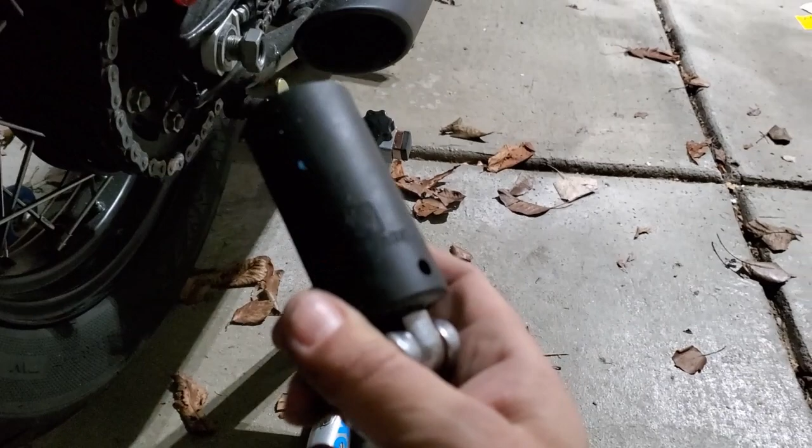Okay, so for the next thing we're going to be doing is taking off the rear fender. In order to get off the rear fender, you are going to have to take the entire back wheel off, and that's going to require you to put this up on a paddock stand so you can spin everything around. It's going to take a 27 mil on a breaker bar so that you can get this bolt here off.

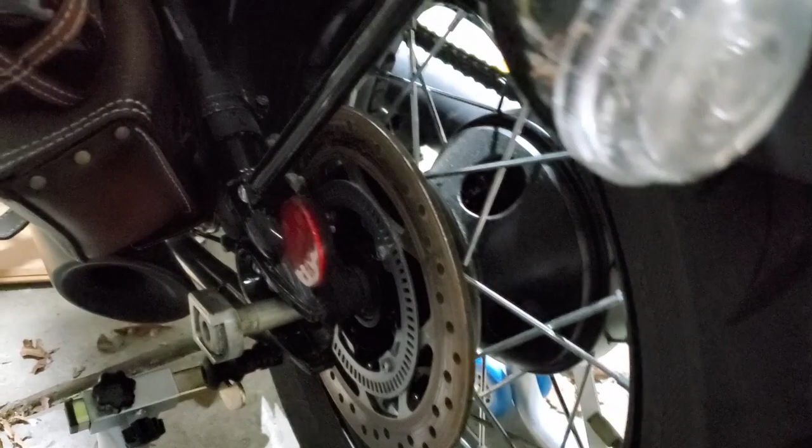You're going to take these pieces off, make sure you don't lose them. We're going to go back to this side, and we're going to start pressing this out. I'm going to need both hands in order to do that. So we'll be doing this with, the wheel's going to be off the next time.

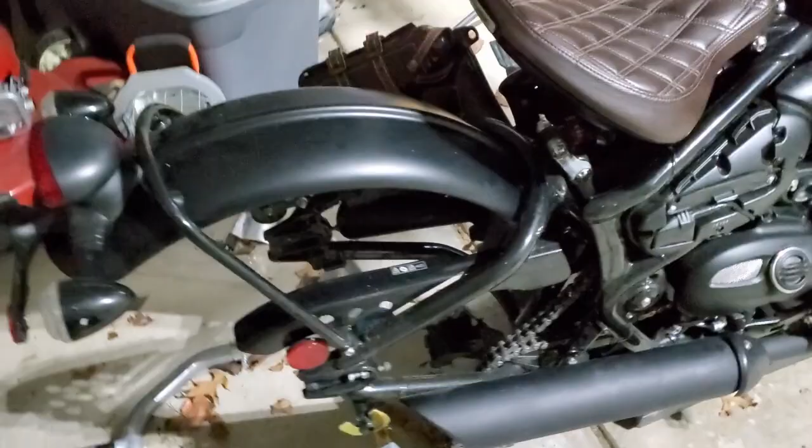I'm going to take that pin out and pull the chain off, okay? Okay, so that took 2 hands, and you just got to tilt the wheel in order to get it out.

Next thing we're going to do is use a T30 star bit, and we're going to remove these bolts here. Then we're going to go down, and at the bottom of the fender are these two, which hold it all in. So that is going to pull this piece here apart, and most likely we'll undo these ones over here as well, get it off of this mounting bracket.

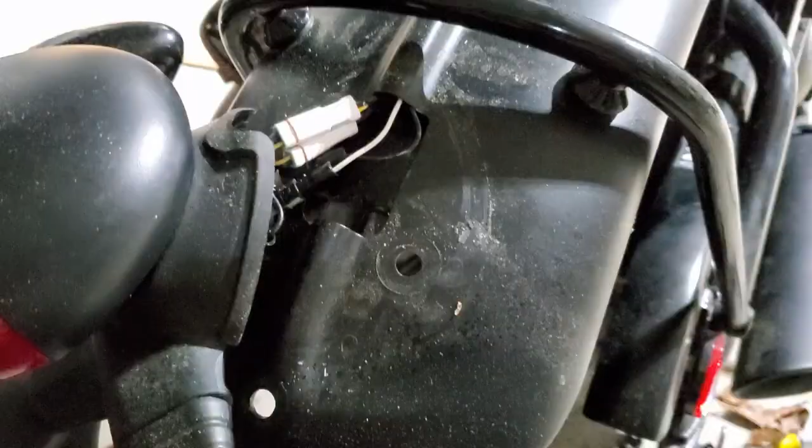Okay, so now that I got the rear assembly unbolted, what I'm going to end up having to do is unplug the lights in the back here, and the wires, if you can see, get routed through these little clips. It's hard to focus, but we'll be pulling the wires out of these clips all the way back down here so that when it comes time, we can pull everything through there and then wire the lights that are going to go in the back over here. Then I'll finish taking off the rest of the fender.

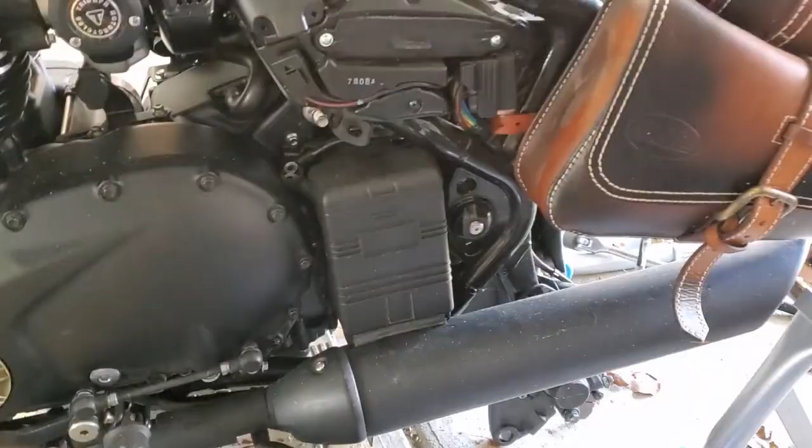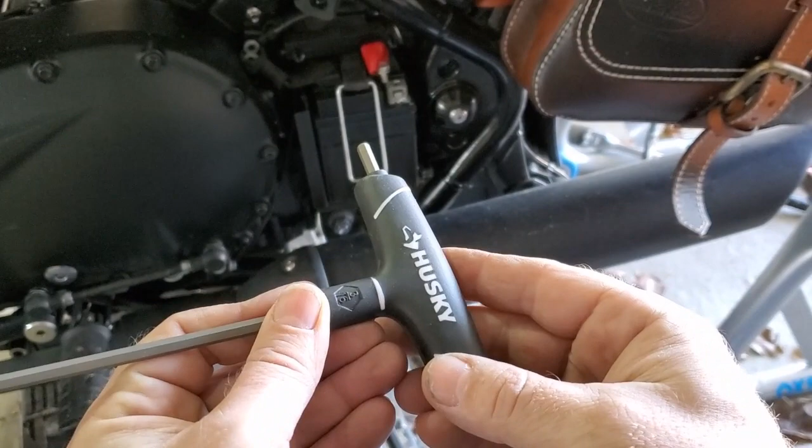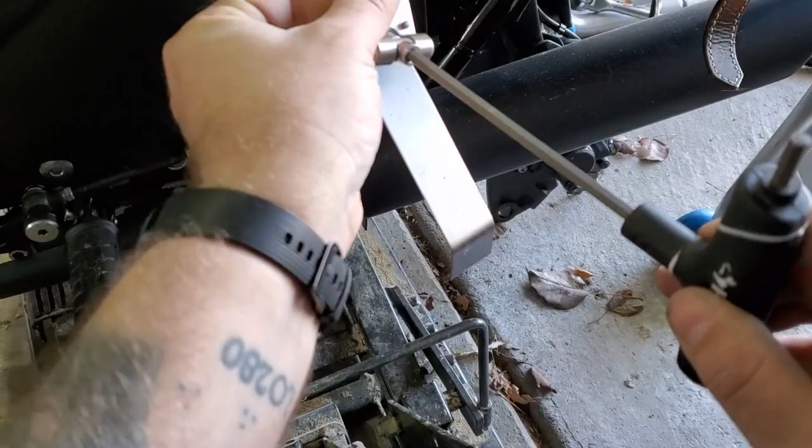Now, before we go any further, it's going to be important to go ahead and take out the battery. You pop off the cover. In order to do that, you are going to need a 3/16 Allen key, and you just put it in here, unscrew that, and that'll take it out. Go ahead and you're going to disconnect your positive and your negative.

So you got a Phillips head for your positive, and it's going to be another 3/16 for your negative. And then you're just going to disconnect and pull out your battery. That way you can do all your electrical work and not really have to worry about it.

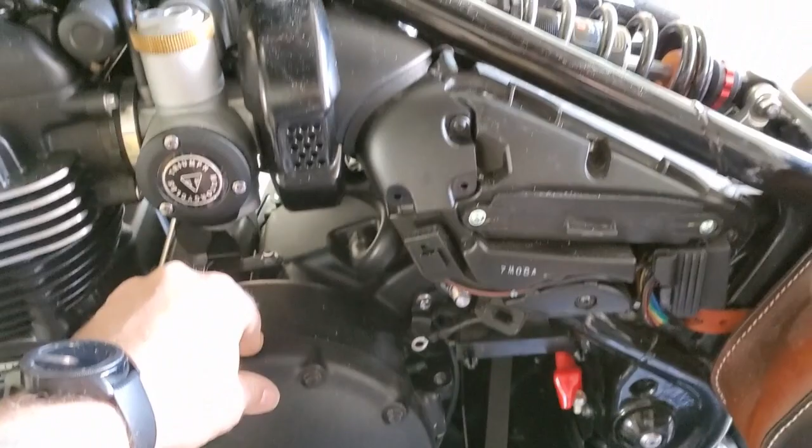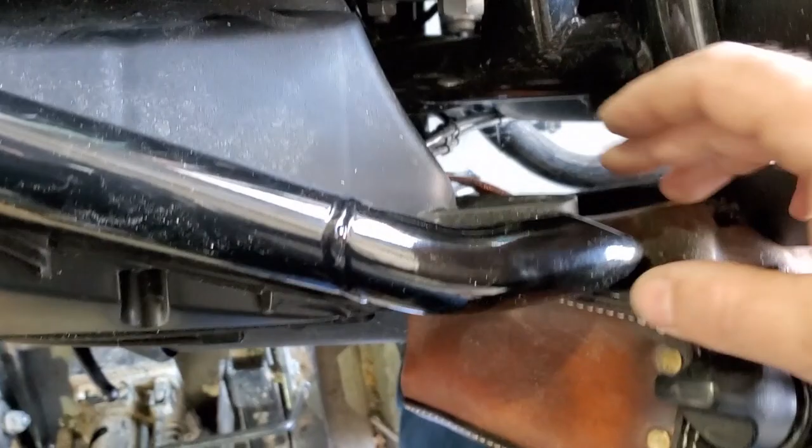Next thing you're going to do is you're going to be pulling out your air box. To do the air box, you're going to be undoing a 12 millimeter bolt that's back here. Pull that out, and then you're going to have to take off this cover here.

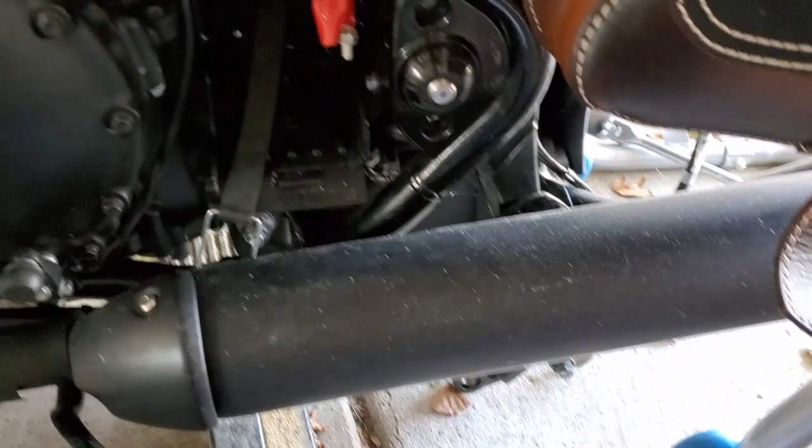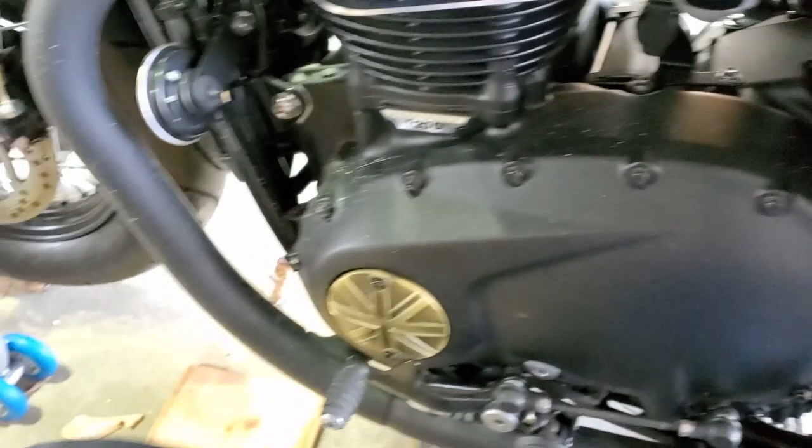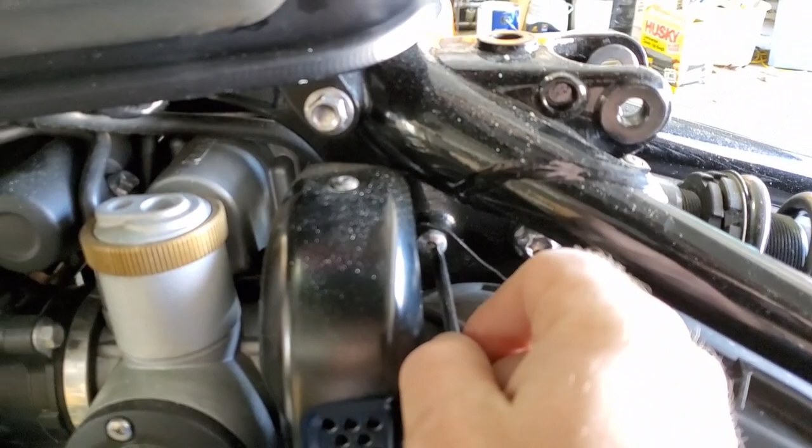I forget what size, but it's a little star bit. So you're going to pull that off, and it's going to expose the next 2 bits that you're going to have to undo. These are back here, and these are both 27s. So at the top there, you're going to undo this one, and then down here, it's kind of hard to see, but there is another one down there that you're going to undo.

Once you get those undone, you're going to take out this box here.

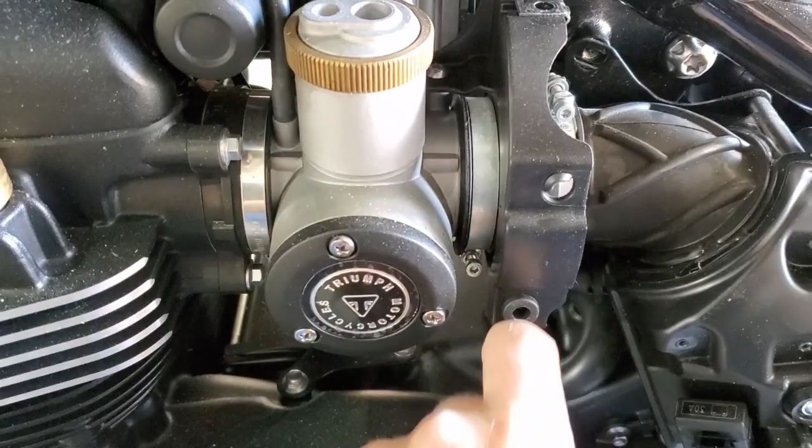So one thing the instructions don't seem to tell you is that in order to take this off, you're going to end up having to undo these 2 clamps over here. And these, you take off your cover over here. That's a T15. I didn't tell you before, these were T20s.

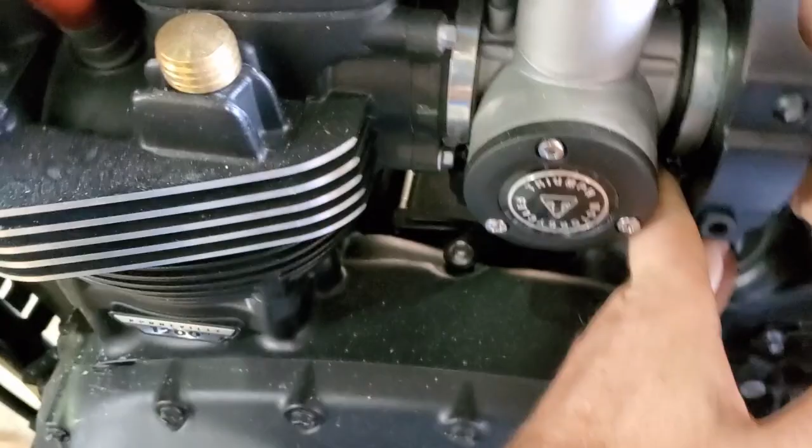And so now that you got this unclamped, you should, with a little bit of monkeying, be able to disconnect your air box. Okay, and that'll take a little bit of work.

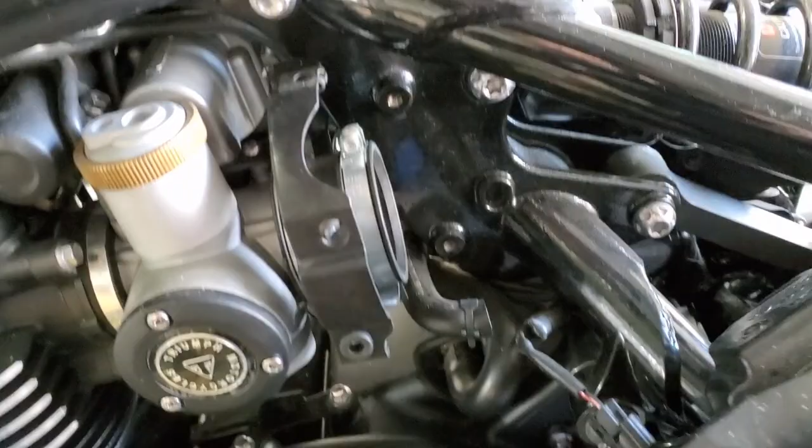All right, so just a couple of quick things. In order to disconnect this, there is this plug here that you're going to want to unplug from here. And then you also have your hose here that you are going to be unplugging from over here.

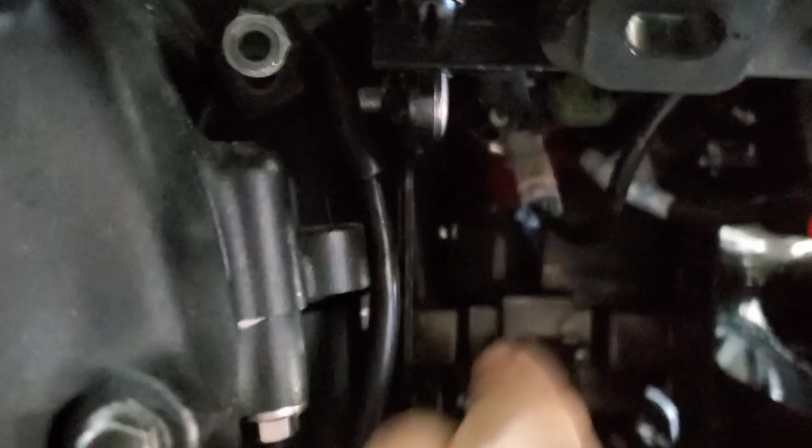So once you get all this stuff off, you are looking for this wiring connector, okay, and this is for your turn signals and everything, and you're going to want to unclip that one. Just be careful in the winter, it's a little hard to get that piece down without the fear of breakage.

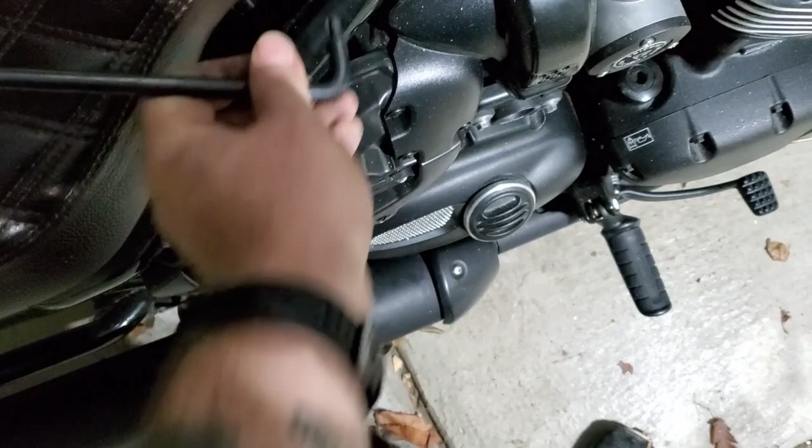Next step is going to be taking off the seat. Here you use a number 50 star in order to undo your seat bolts, and once you get all that off, you just pull the seat off.

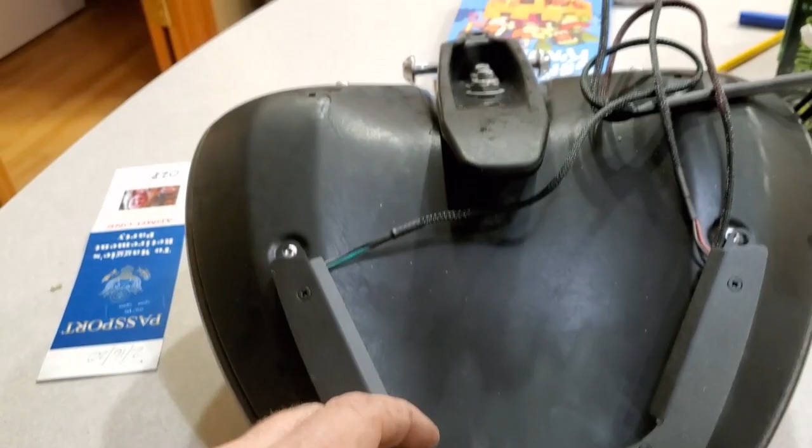All right, now that we have the seat off, our next steps are going to use a number 3 Allen wrench on these bolts up here, and then a number 15 star wrench on these over here. What we're going to do is essentially mount this light bracket to these pieces and then put the emblem back over it.

Okay, just a quick tip on when you're putting this together. Number 1, don't forget the washers that come with the kit, that's where they're going to go. Number 2, when you tighten this up, make sure that you tighten these down first, because if you do these ones first, then everything will be way too lifted up. So if you tighten these first, then go to these ones, everything will kind of bend into place.

And you're left with something like that, which looks pretty damn snazzy. I can't wait to see how this is all going to go together as far as wiring goes and tucking everything down underneath here.

I previously had a little mystery as to what was going on with this hookup over here for the wires, because as I traced them up, I realized that the old harness did not match at all. So as it turns out, in my kit I was actually missing a replacement wiring harness that is supposed to hook in there. Okay, thankfully I just gave a call and an email to Justin Vogel.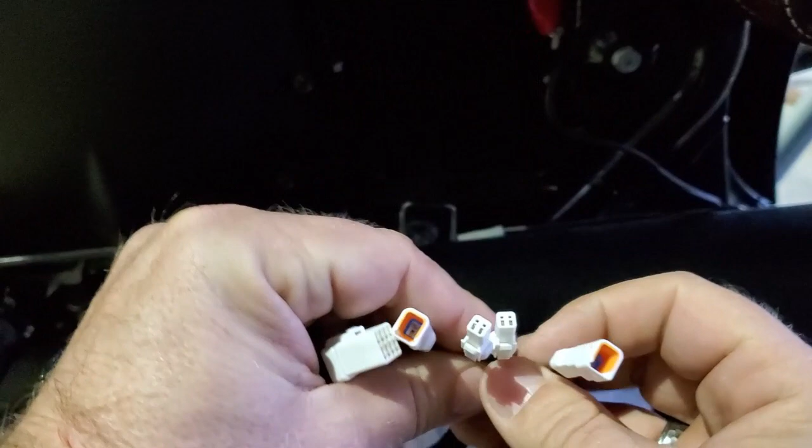He gave me the new clips, and this part will plug into where the other one did, and then I have matching wiring harnesses for the other parts. Okay, so I'll be able to go ahead and hook that up and get the seat lights running.

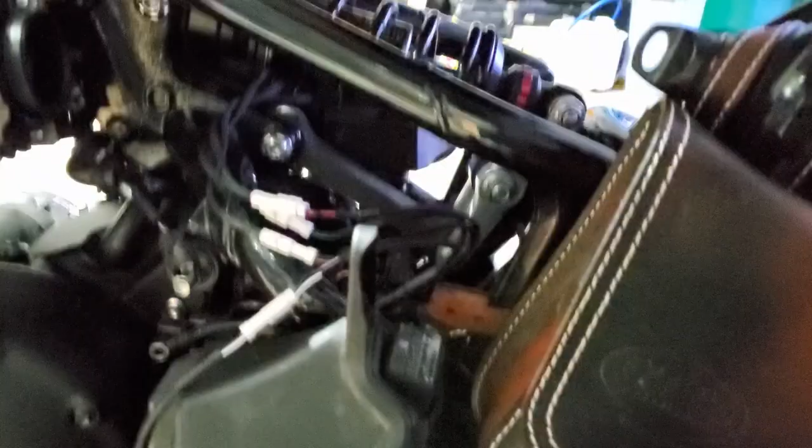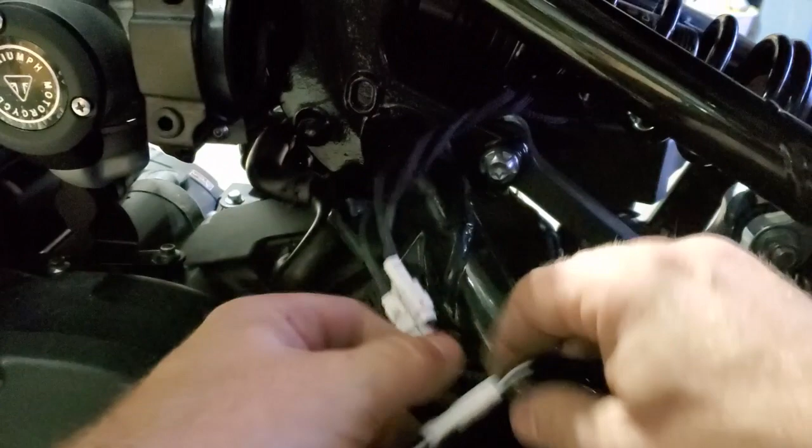Okay, so now everything is plugged in. The new harness is routed through down here and going back into the battery box. Okay, so that is all hooked up. Now, you have your connectors with the new harness: green and black to green and black, red and black to red and black, brown and black to brown and black, and then you're going to have your white and black.

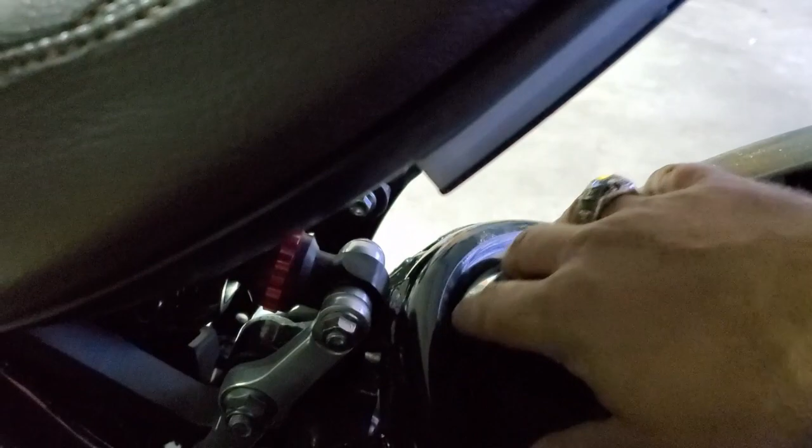Now that is going to generally, usually if you weren't going to be doing the license plate relocator, you would then route this all the way back here and have it all set up for the new license plate bracket. Now, because they do not supply a mount or anything to cover up this god-awful hole in the rear of the fender, what I'm going to do is I'm going to cut.

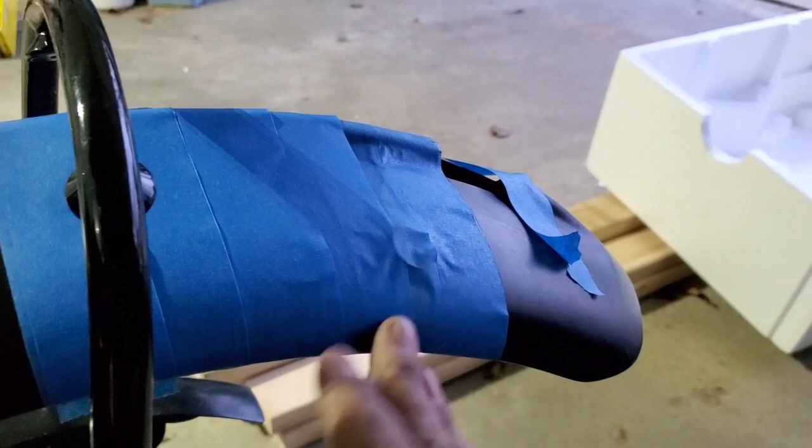That's going to be a this-weekend-with-a-single-drink-to-steady-the-nerves type of job. I'm not one with good luck when it comes to cutting frames and such, but because I'm not using their relocator up here for the regular kit, I'm using the swing arm relocator that I have mounted down here.

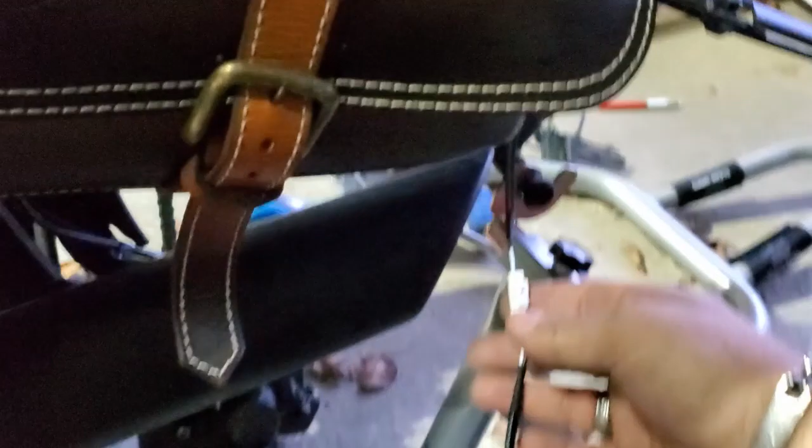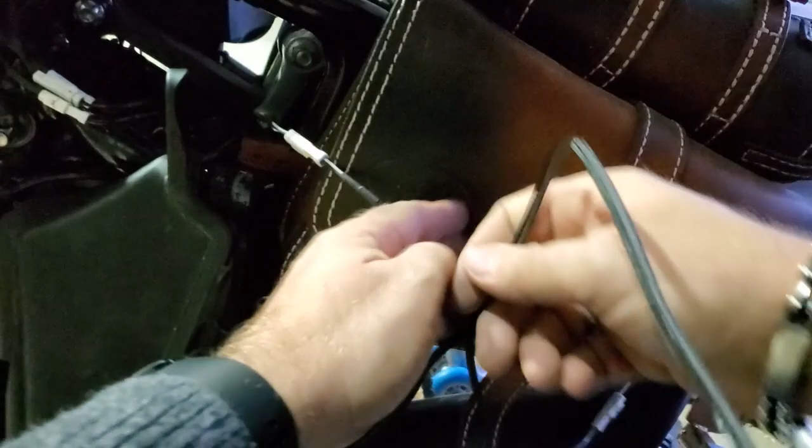One of the things it does is it gives you this extension connection, which I have hooked up here, and I'm going to just have to tidy up the wires and hide everything behind the saddlebag. So that'll all be zip tied there.

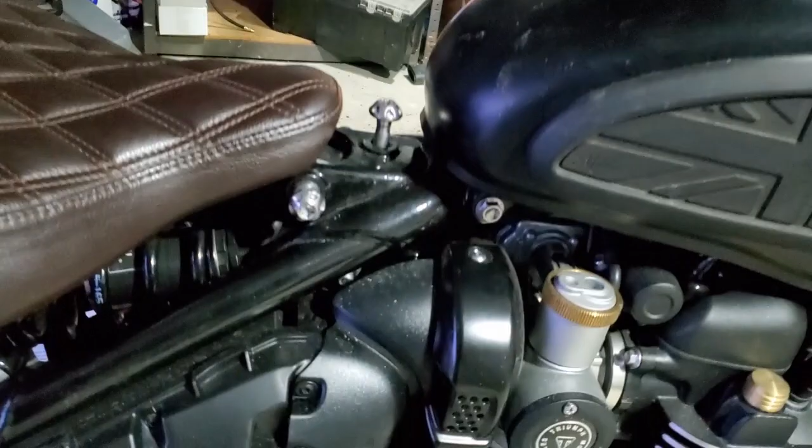So now that that's done, we have the lights for the seat hooked up. I just gotta basically tidy it all together, try to hide those wires as best as I can, bolt everything back down, and then I can replace the airbox and the battery and test the lights.

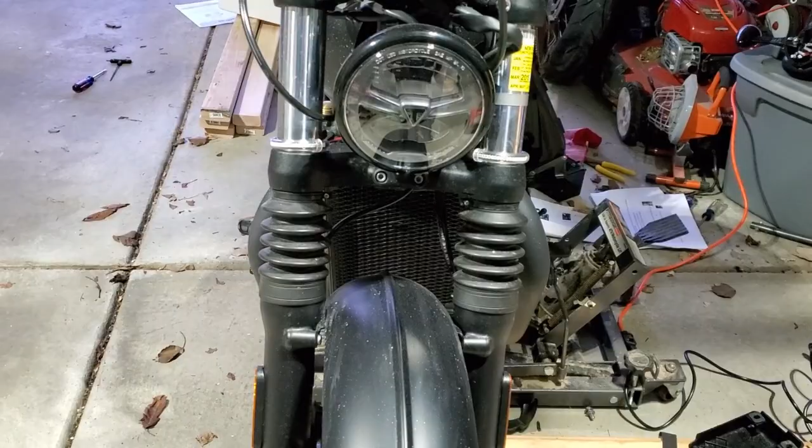There are instructions because after you switch out for LED, a lot of people are complaining about the lights flashing too much. There are instructions on how to make that less intense and more of a regular flash. And then I already have the turn signal swapped out for this, and pretty soon I should hope to be done.

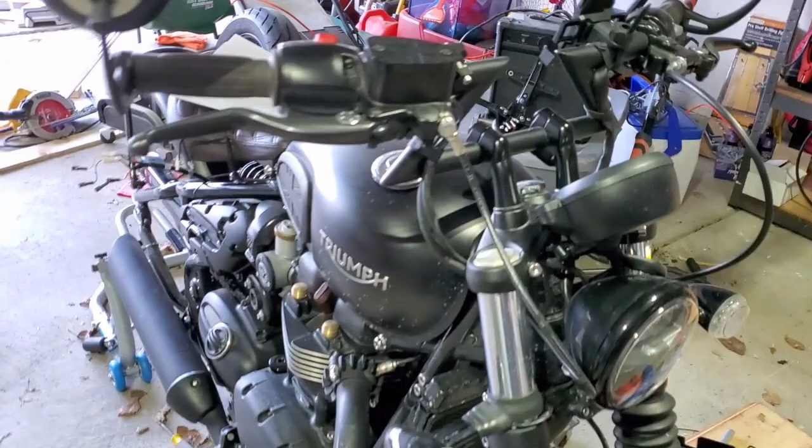The next project is installing these new Rage Cycles 360 turn signals. We're going to take off these big old stock ones that just kind of fit around. The new ones make it so the turn signal can be seen from the front, from the side, and even from a little bit of the back. It also really cuts down on that profile.

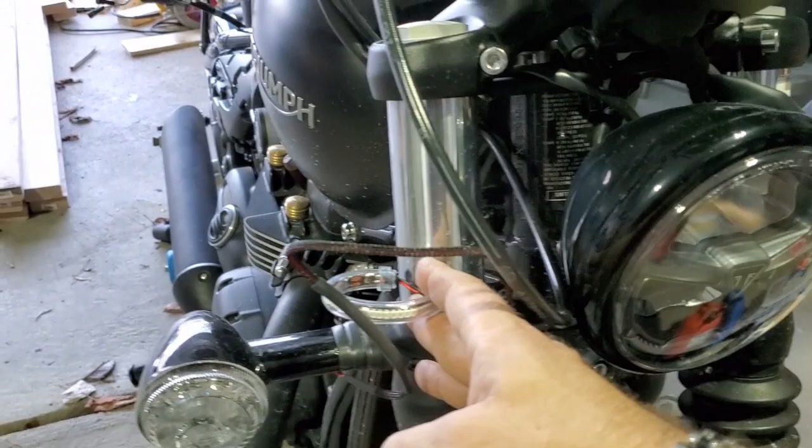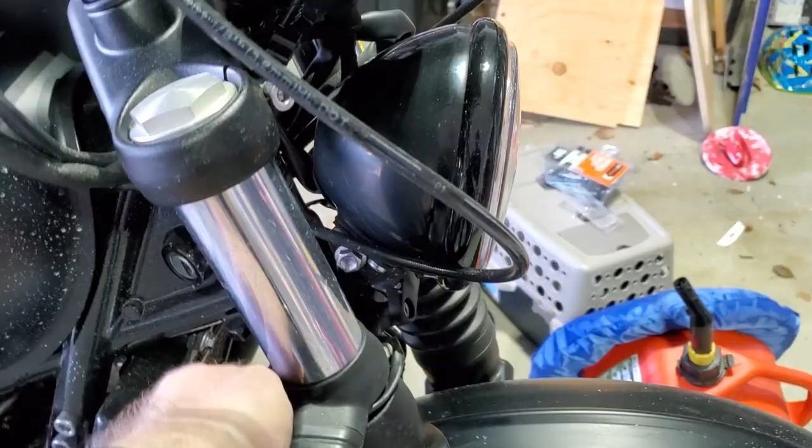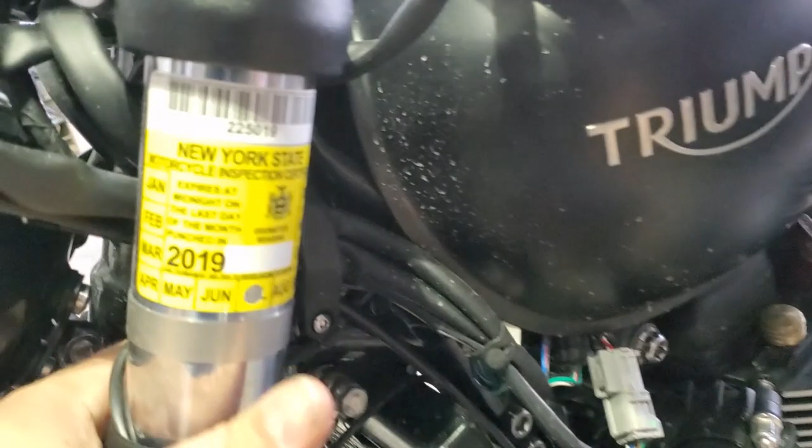The first thing we're going to do is take a number 5 Allen key and undo all of the lights. We'll pull them through the wires, get them all down here to where the wire harness is, and cut the wires. Then we're just going to hook these up.

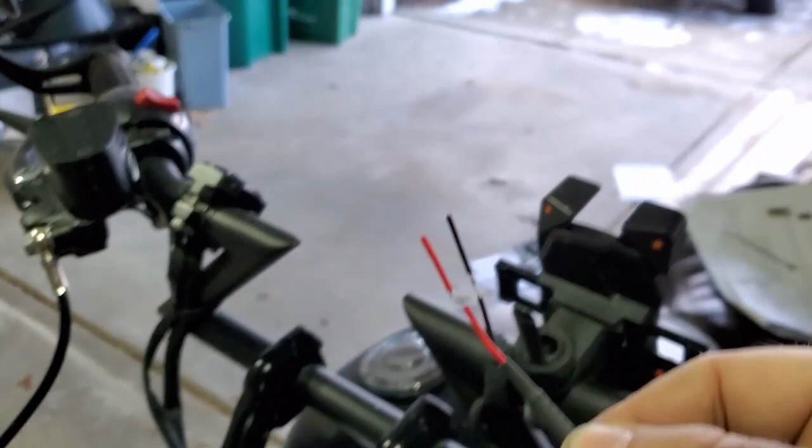I've got these heating, soldering shrink wrap connectors, so it's going to end up being a fairly easy process.

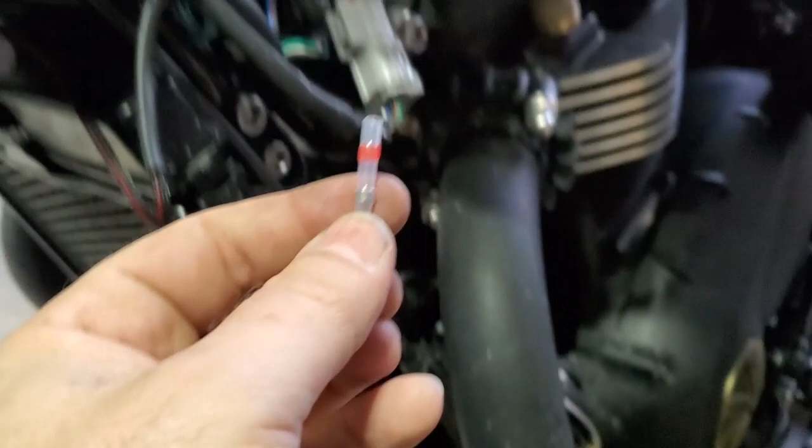Here are the soldering connections I'm using to put these wires back together, using the red ones in this case. What happens is you put it on, you heat it up, and that solder will melt.

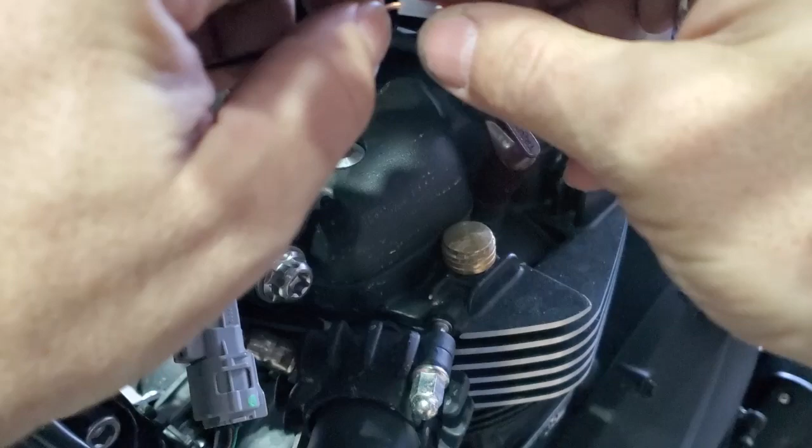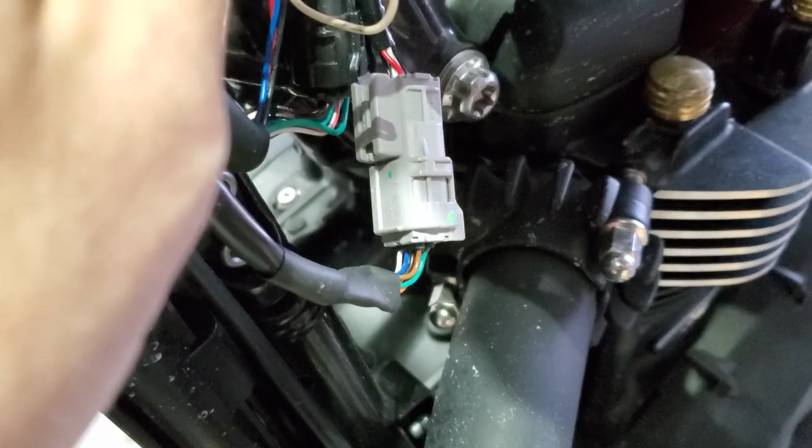I'm going to try to get this on camera. Now mind you, the worst luck I've ever had with a bike all comes from an electrical issue, so I can't say I go into these types of projects being super confident. So we just go ahead, get our heat gun, Harbor Freight special, and apply some heat.

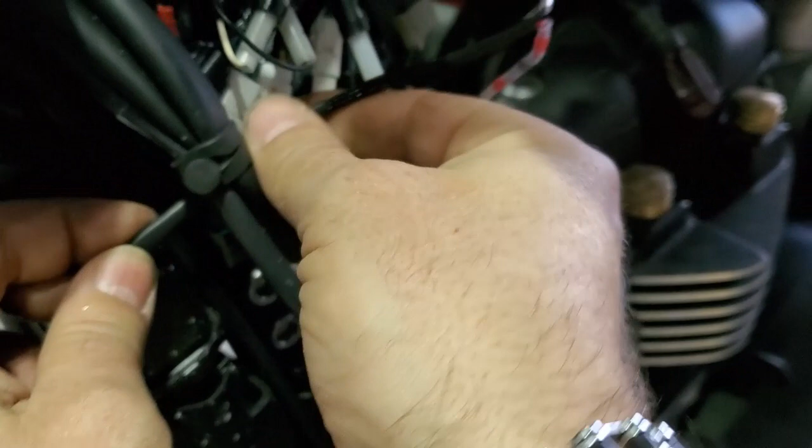We'll just let that go ahead and cool off a bit, and then fit this shrink wrap over. We'll do that to all the connections.

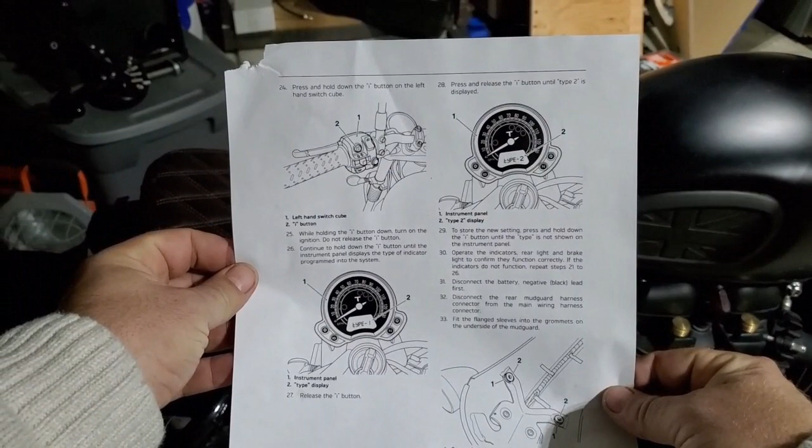Now that we've got the battery rehooked up, we're going to check to make sure all the lights work. We can expect that all of the turn signals will flash a lot faster than they normally would, but I have a set of instructions we can follow in order to set them to type 2 LED.

So what we're going to do is go ahead, set it on, and let it do its funny stuff. Starting off with the brake lights — let me get a better angle of that if I can.

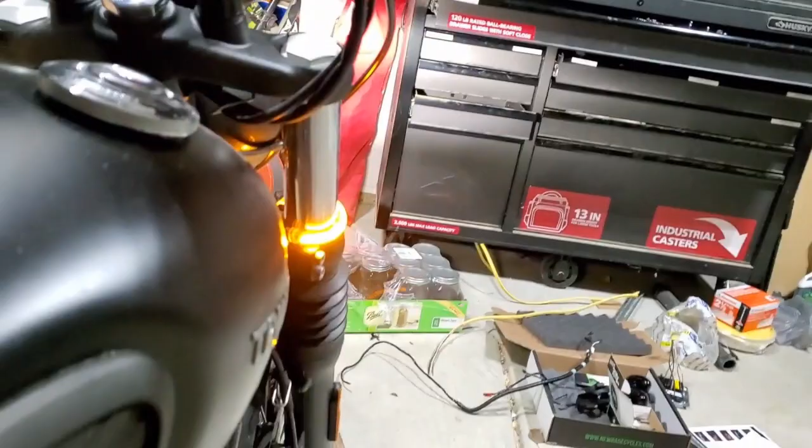Okay, starting with the turn signals. See, that goes pretty fast. And you can see over there, pretty fast — very fast, but they work. And the four-ways seem to go at a normal speed.

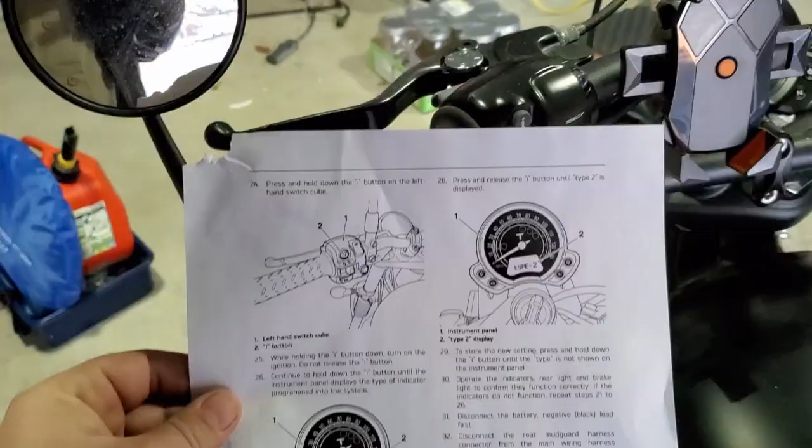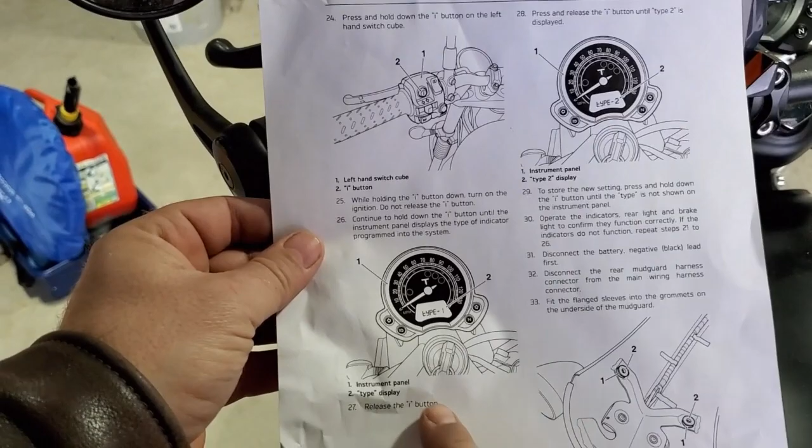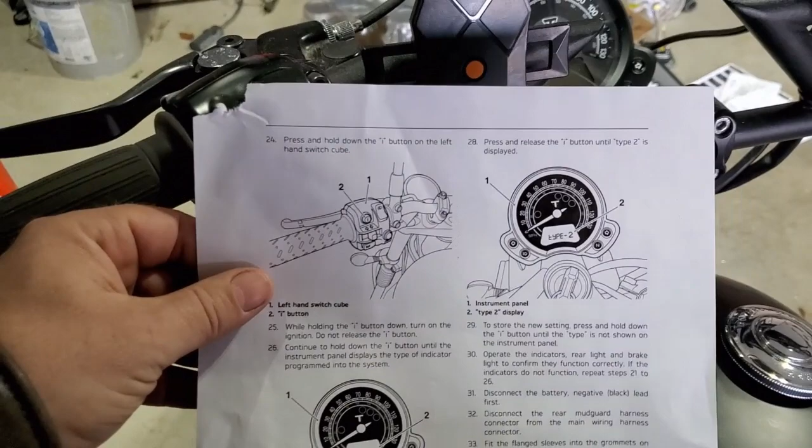Let's go ahead and take a look at these instructions here. To deal with the quick flashing, we're going to change the type of lights from type 1 to type 2, which is the LED setting. That's going to slow down the flashing so it's more like a regular indicator. This page is pretty much straight from the Haynes manual.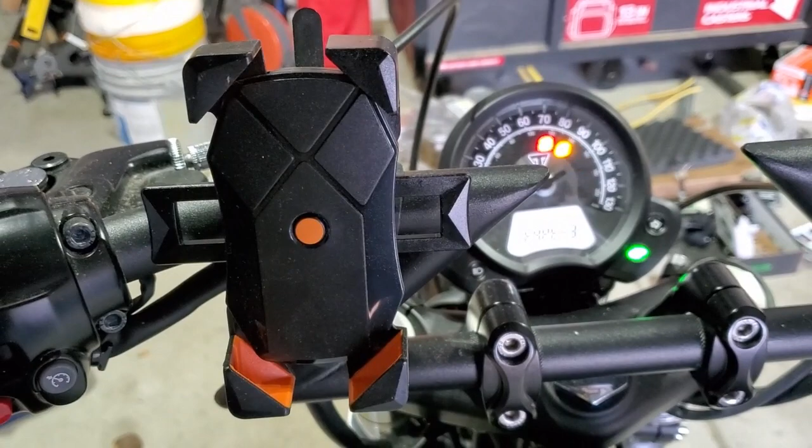What we're going to do is hold on to the I button, and we're going to change it, just hitting the buttons until it reaches type 2, then hold it until it's no longer there.

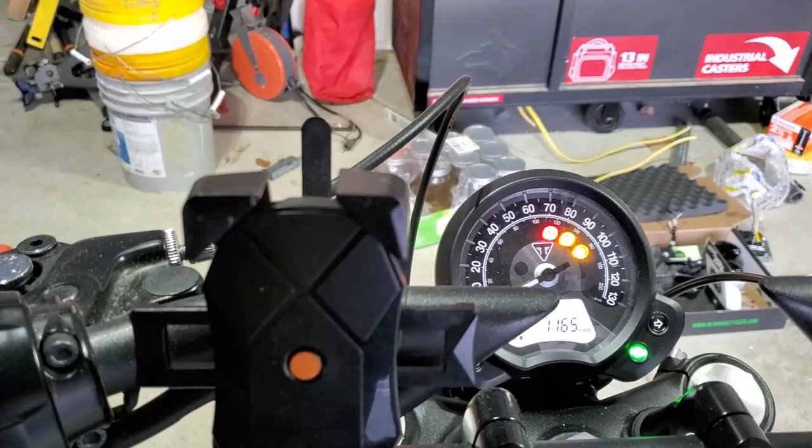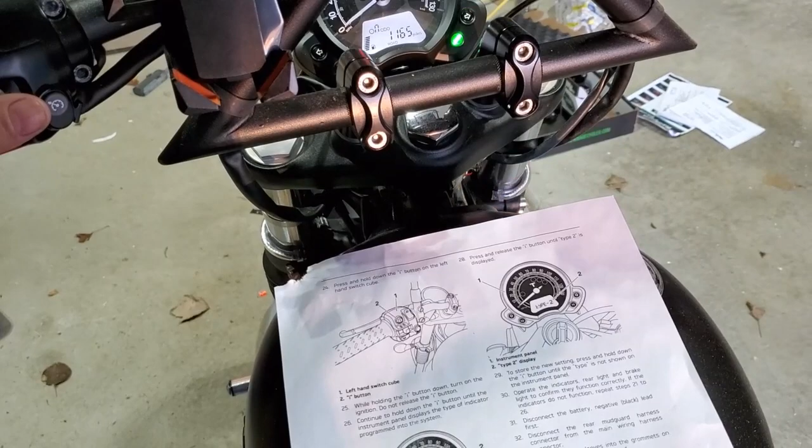Now let's go ahead and confirm that everything's working. Still seems a little fast. As it turns out, for these types of signals, instead of type 2 like it shows in these directions, you're going to have to set them to type 4. With type 4, everything flashes at a normal pace.

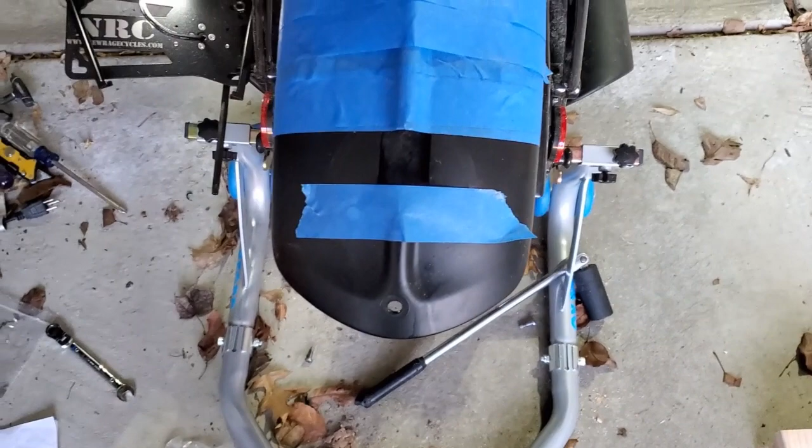So, pretty sure we can call this part of the installation done. Next, we're going to turn our attention to the fender — that'll be a different video.